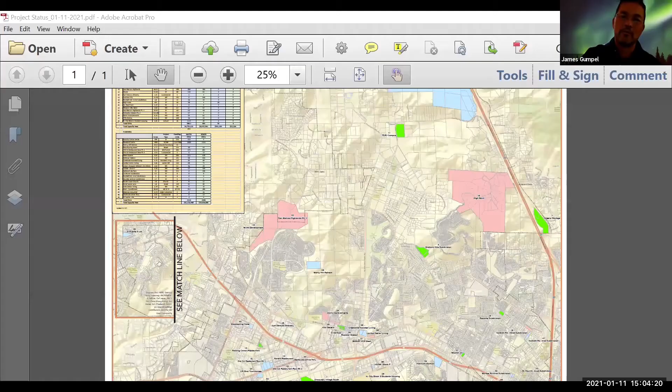Sure, okay, let me share my screen. So you guys may remember this map, and it's hard to translate on a Zoom meeting because it's a large map. So I'm not going to go into every project like Rob did—I'll stop and focus if any of the members have questions.

As far as coloration, if you see this green color, those are projects that are actively in construction. The pink or salmon color here, those are projects that are in plan check - little ones here, Richmar area off of Mission. And then the light blue color, these are new ones, planned projects that may or may not happen.

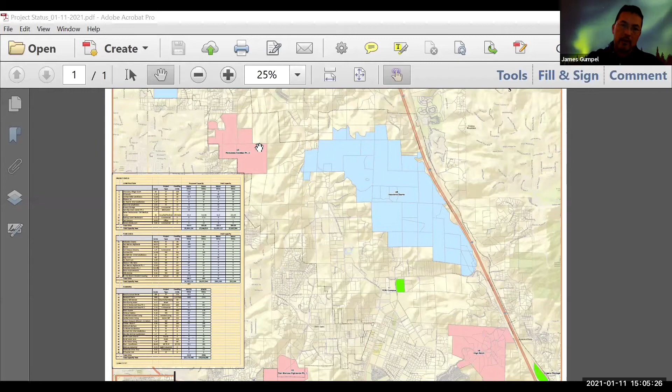As a reminder to the committee, projects that are in construction are certain - that means from a cap fee standpoint we've either collected or are going to collect it within the next year or two, three at most. The projects in planning aren't as certain, they're probably three to five years out before they're in construction, most likely. Some are less, and some, like this one here, may or may never happen. The project in planning is beyond five years out to may never happen. Newland here is a good example - they're more than five years out before they could do anything.

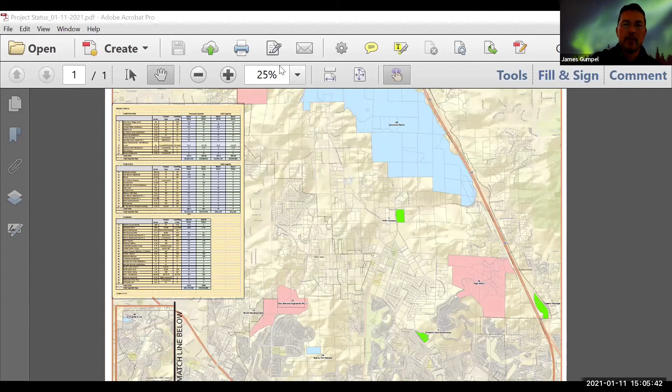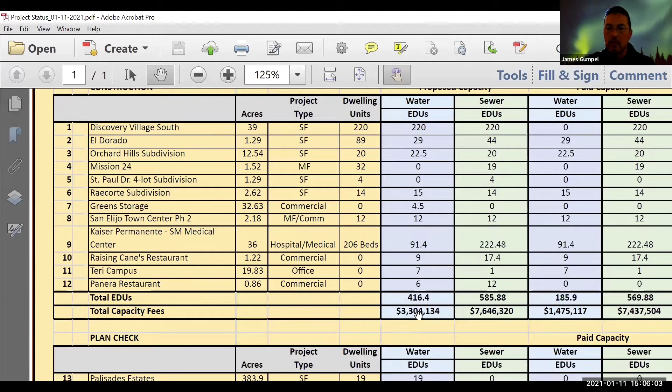So let me zoom up on the table and go over a couple projects. Here is the first project, the construction. The way this table is organized is we have the listing of projects in construction for our development services group, and the proposed capacity fees. You can see we're proposing here a little bit over 3.3 million in water and 7.6 million in sewer.

This next section is what has already been paid. In water, we still have almost $2 million to collect in capacity fees, but in sewer we've collected the majority of them. That's because of this project right here, number 9, Kaiser. Kaiser had 222 sewer EDUs, and they came in a few months ago and paid for everything - all their water and all their sewer.

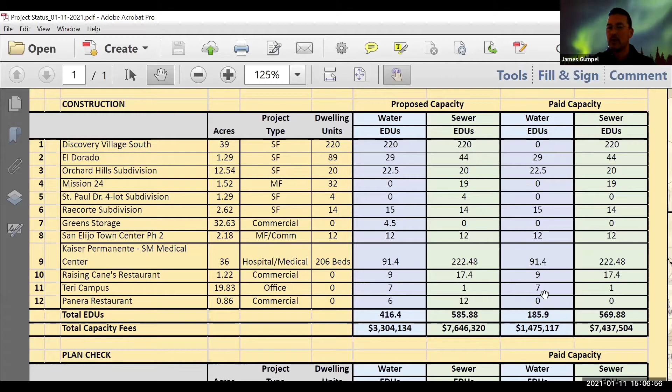So you can see across the board that they zeroed out, and they made the lion's share of the sewer capacity fee. Some of these other groups have paid capacity, like Discovery Village - they paid sewer capacity before we updated the cap fees ahead of time, and they knew the water wasn't changing much, so that's why they didn't pay water. That's why you see some of these numbers fluctuate. But we've done a pretty good year - this isn't an annual number, we're basically collecting sewer capacities, and we still have more water capacity fees coming in the next couple of years.

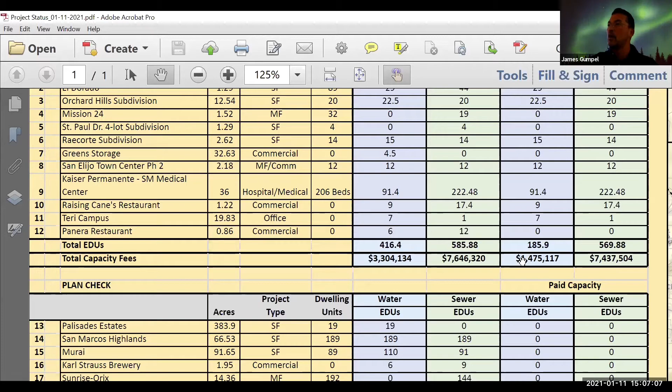On the planning side, these are projects actively in plan check. We have more than this in plan check, but these are the active developments - a lot of the other ones are smaller services or smaller projects. You can see here we have about $4.7 million proposed in water and about $9 million in proposed sewer.

Not much has been paid, and the main reason is the only one that's really been paid is this High Point project. The board may remember High Point development, the backside of Palace Vista or Emerald Heights, that went bankrupt in the recession. They had all their sewer capacity and water capacity fees paid. You can see everybody else is taking advantage of - it's not time for them to pay yet.

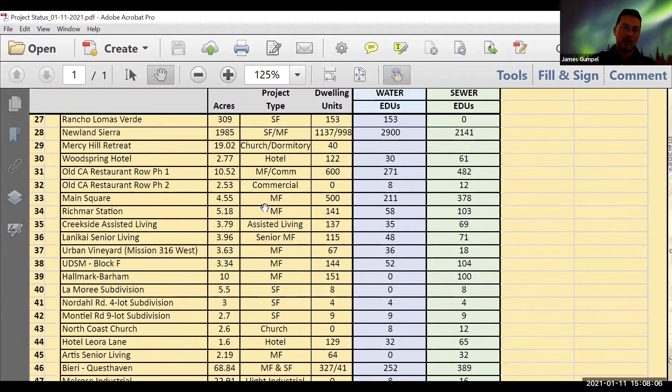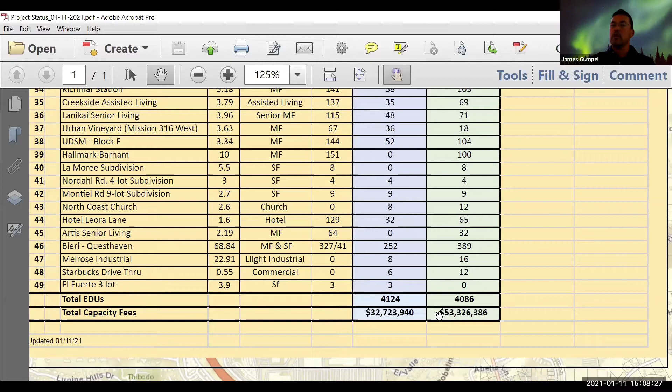And then the big pie in the sky numbers, all these planning projects - they have water sewer studies, other activities that the engineering staff has worked on, but they have not entered into plan check. These are big numbers, 32 million and 53 million. But some of those will never happen, some will get bigger, some will get smaller throughout the planning stage. So those aren't certain, and what we do is just shift the projects up from planning to plan check, from plan check to construction.

With that, unless there is a specific development that the members have any questions on, I'm happy to take any questions.

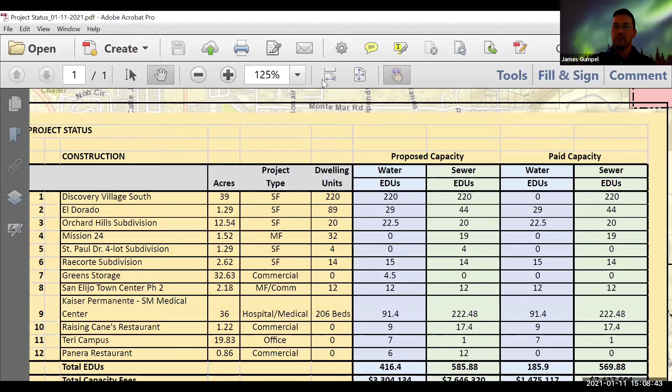Okay, any questions from Director Hernandez? No, I don't see.

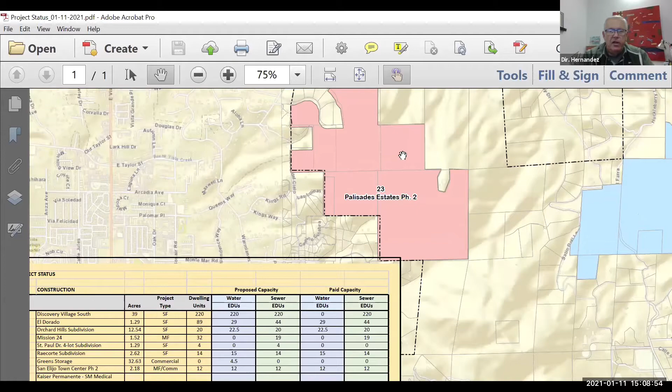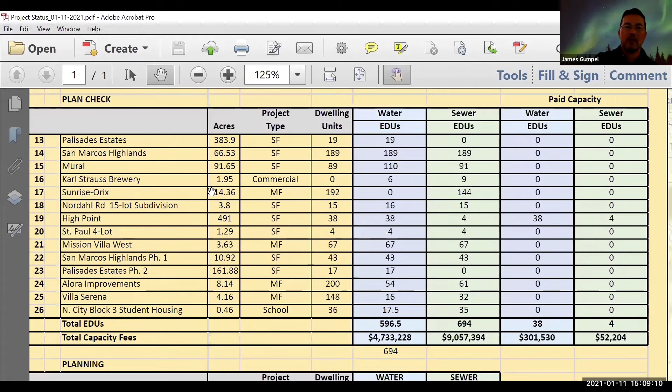What were they calling that - Main Street Plaza? I think that was a plan, but they never came forward to us. They've been working with the city, but they've never actually come into us for plan check. So we had them on - probably if you look at a report from a year or two ago, they were on the planning side. They've never actually come in, so I don't know if the city has it or not.

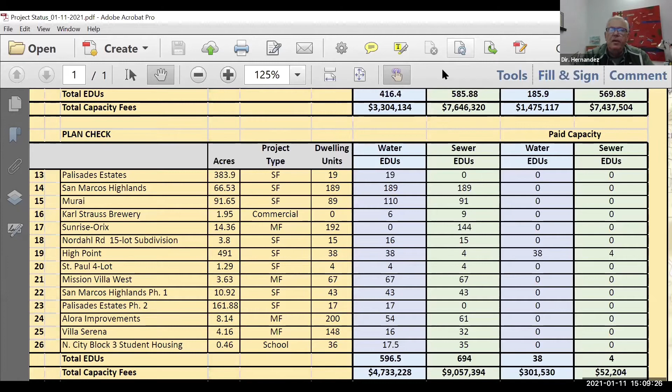Okay. Yep, that's all questions I had.

Before we move to the next item, an update on the Newland Sierra project. We received a letter from Rita Brandon at Newland Sierra confirming we've stopped all processing of their project. As you know, there was a voter referendum and the project lost, so they're not allowed to move forward. I don't know why Rita sent the letter, maybe to avoid incurring additional costs, or there's some land development reason requiring notice to all agencies with approval authority. I just wanted the board to know we received that letter. I confirmed with James, and I'll reach out to Rita to let her know we are not actively processing, nor will we unless they reinitiate with a new submittal.

I do have another question. Did we hear anything at all from Karl Strauss? Yes, unfortunately Karl Strauss has stopped their process at the city and is not moving forward at this time.

Do you know if that was COVID related, James, or something else? Maybe, I don't know. It happened earlier, I'd say middle to late spring of 2020, so COVID was here but the full impacts weren't known yet. I got the feeling they downsized it from a full beer garden restaurant to a brewing hub with outdoor seating, where mobile food units could permanently park or rotate, since they weren't going to serve food themselves. They'd already downsized quite a bit, and then they just stopped the process.

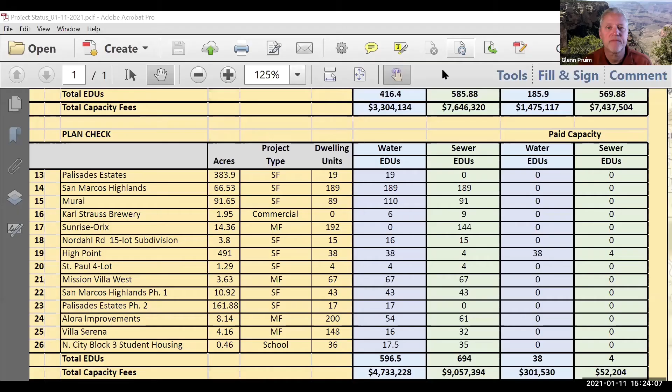As the committee may recall, we went forward with the septic hauling study, and in that study we basically showed it probably wouldn't pencil out with what the septic haulers are willing to pay. I think they're at 12 to 14 cents, and we were at 18 plus cents to do it for us. Then Sedron, a Pacific Northwest company, contacted us out of the blue, and we started going down that path.

They could basically provide a septic hauling facility, and they produce high quality water out of it. It's not potable water, but maybe could be used as recycled water. So with that, we thought maybe to co-locate it at our Mahr site.

This is a picture of the Mahr site. Can everybody see, it's just a Google image? Yeah, okay, yep.

Because it's kind of an industrial looking pump house, it basically looks like a treatment plant for septage. There'd have to be improvements on site, but we put it down here close to the bottom of the dam where we can. There'd be some earthwork necessary, but it would keep the line of sight from these houses.

You have Rancho Santa Fe Road here, and granted some of these houses across, and this new fire station, would be able to see it, but it's still sunken down below the road.

That being said, we've been actively meeting and discussing with the regional board. You may recall the last committee meeting, Rob Scholl presented this. They said the company Sedron was very optimistic, and we would just get a portion. So it'd be zero cost to Vallecitos, and we get a portion to basically allow them the property and the facilities to do this. None of it would go to Encina.

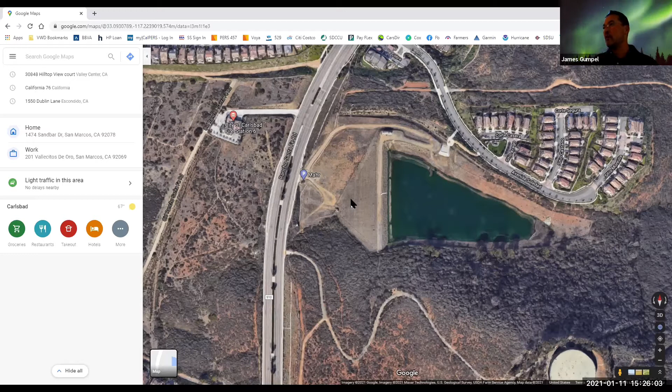They're harvesting the solid material and reusing it for other means, whether it's fertilizer or other means. And then there's a little presentation of their technology. I didn't copy that presentation because I don't want to get into that portion of it.

The update is, and we suspected this, is they've never done anything in California. So we said, you need to get to the regional board. They went to the regional board, and the regional board says you have to go through a bunch of hoops. They said, can we just do those hoops? And they said, absolutely not. So that's where we are today.

We've had 2 conference calls in the last 3 to 4 months with Sedron Technologies and the regional board. They're quickly learning they have to go through all the testing here in California, go through the regional board process. The regional board may kill it completely, to be honest, because even though we told them this would be a process that has to go through this type of vetting here in California, I don't think they really believed us, because they were able to do it up in Washington State without such oversight.

So I have a conference call coming up, hopefully sometime at the end of this month or early February. At that point there'll be a more in-depth discussion with their company to see if this is something they're going to move forward with, because they're just starting to get an understanding of what it's going to cost. They got some consulting pricing to help them out with the regional board process, and it's supposed to be done towards the end of the year, but they said it's going to be done in January. So based on that, I'll probably have another update at our next meeting, or maybe the March meeting, depending on the timing, and hopefully more substantial information on it.

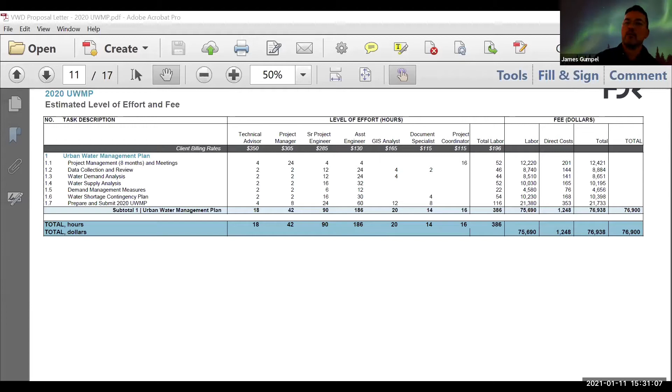Rob Scholl did our urban water management plan in-house in basically 2015. And in 2010, we also did that in-house. But each time we use a consultant to double check our work, just so we had that extra set of eyes that wasn't directly working for the district, in case there were questions.

And we used the same staff. Basically, we went out for proposals, used the same staff. But in this case, when Rob announced that he was leaving, I knew that we wouldn't have the ability to do the work in-house. So we went to HDR.

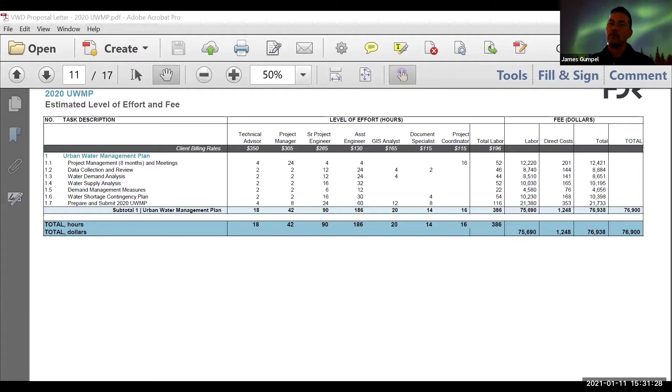And the reason we went to HDR is because the team at HDR reviewed our 2015 urban water management plan for compliance and completeness. And the staff worked on our 2010 plan, working for other companies.

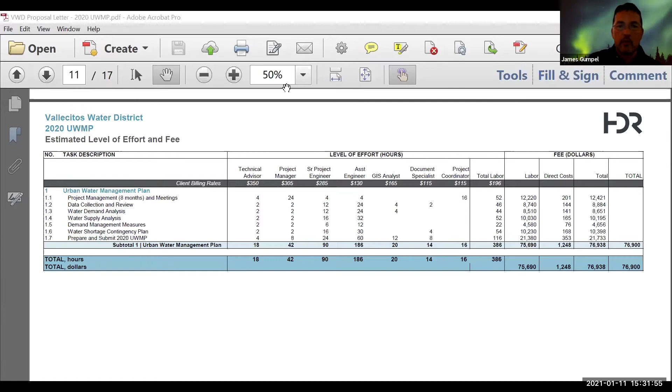So what I'm sharing here is really their scope, kind of going through it. I'm sorry, I'm going to zoom up a little bit because I'm looking on a laptop screen. Basically, it's the primary goal.

You've got your regular project management, your data collection review. Obviously, you have the water demand and the water supply. And then you have basically the other statutes of the water management plan.

The committee may recall the way it works for us, or really all member agencies, is our plan dovetails off of the county water authority's plan. So the county water authority's plan is actually due on June 30th, 2021 also, but they strive to get it done earlier, which gives us the ability to plug in numbers.

So what we do is we prep all of our plans, but we don't have the water supply numbers until the county water authority gives them to us. So we basically have everything done, and then we have to fill in the tables and make some modifications as soon as we get those.

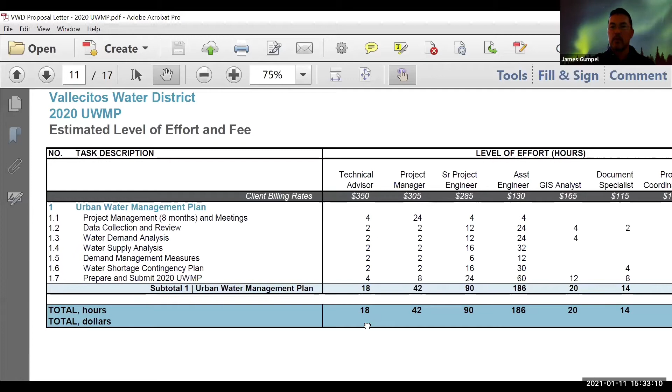Right now there's a committee set up through the San Diego County Water Authority, and I've been part of that. Rob Scholl is our main member, and now I've taken over. So we are getting number information that we're feeding to, or can feed to, our consultant. I knew we needed to get a consultant on board to finish this project up, and I'll be on board, hopefully, with committee support.

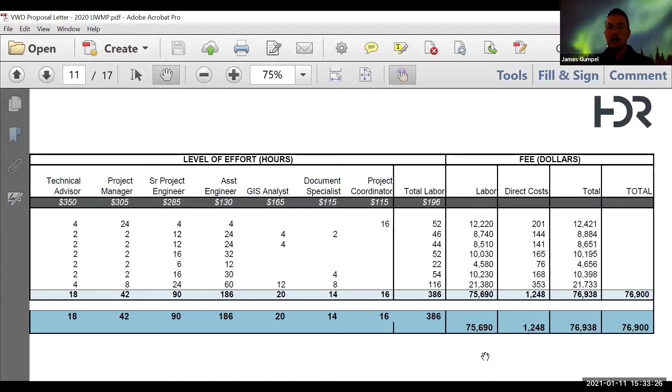Basically, to award HDR to perform the whole urban water management plan for $76,900. We went around and did a little bit of shopping around, and about $75,000 was everybody's ballpark number. I called several consultants and asked them what they're paying, and also I checked with Otay Water Authority, and they're paying about $70,000.

I didn't have a good feeling for where this would come in since we've been doing it in-house since 2010. So that's why I made a few calls to a couple of agencies to see what they're paying, and this is about the ballpark of what they're paying. So with that, I'd be happy to answer any questions.

Okay, any questions?

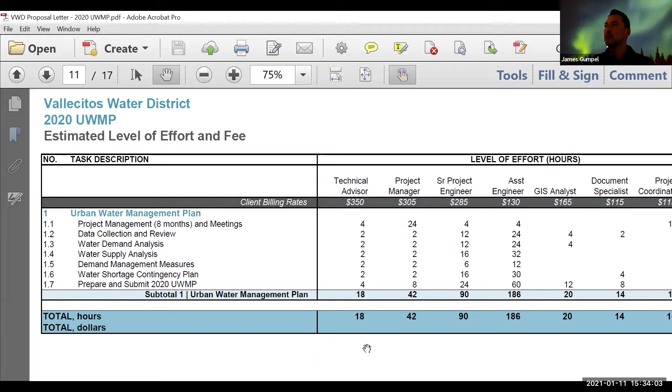If I may add real quickly, the committee members and the board may start to hear that there's some controversy surrounding the water authority's numbers. James mentioned that the water authority produces their document and passes along some information to us. A lot of the controversy surrounds this regional conveyance system project. You remember how controversial that was.

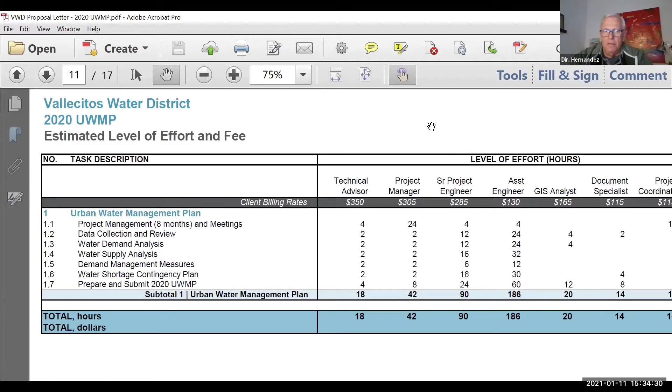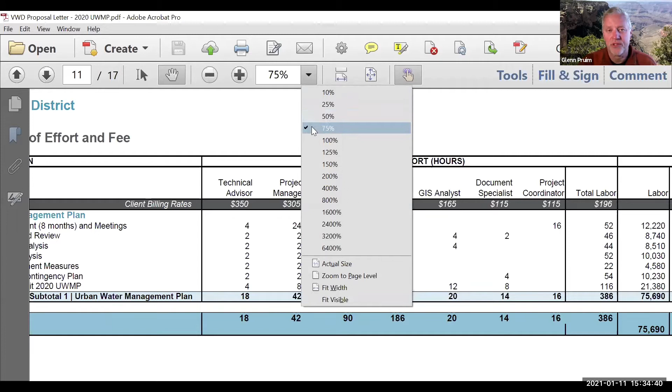There's a sense among some of the general managers that the water authority may be inflating the demands to justify the regional conveyance system project. So there's some pushback in the urban water management plan, more than you would normally see, because it's associated with that regional conveyance system project.

From what I've had conversations with both James and Rob, it seems like the numbers that the water authority is putting together for Vallecitos are pretty close in alignment. But the agencies that are really contesting it tend to be the ag agencies, which are also the ones that were heavily contesting the regional conveyance system project.

They don't like the water authority's methodology. They don't agree with their projections. They think they're way too high, kind of self-serving on the water authority's perspective just to justify the regional conveyance. It would be nice to separate those two, the regional conveyance system and the urban water management plan, but I think they're going to continue to be linked for a variety of reasons. We'll try to vet through that as we go through the effort with HDR.

Just want to give you a heads up in case you see some letters, particularly you, Director Elitharp, in your role down at the Water Authority. Okay, yeah, thanks for the heads up.

Speaking of controversy, with our current urban water management plan, we had some controversy with how we represented things, specifically with the Newland Sierra project. How are we going to, I guess the way we showed water supply availability before and after conservation was kind of the controversy. Are we going to consider showing that a little bit differently or more consistently with other agencies? So we're certainly aware of that controversy.

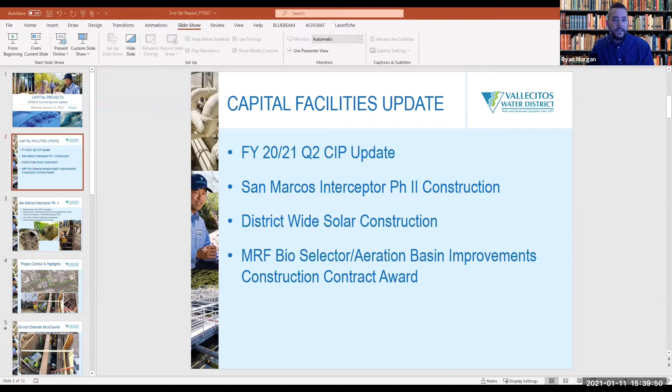To begin, I wanted to share my screen for a moment. We've talked about providing updates to the quarterly reports available online to the public. If you navigate to the Vallecitos webpage and get to the engineering department, you'll see Capital Facilities, where you can click on active capital improvement projects.

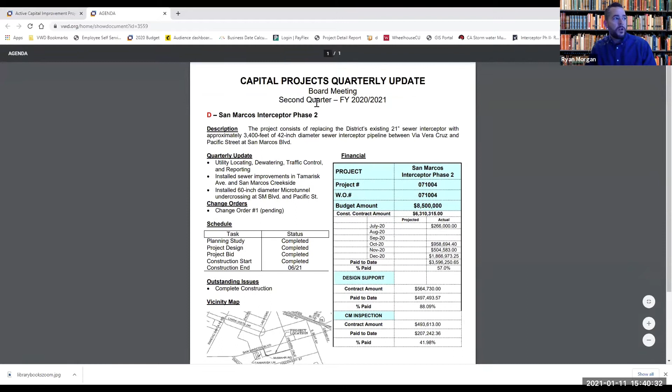That'll take you to an interactive map with thumbnails at our different project locations that are ongoing. If you click on San Marcos Interceptor Phase 2, it gives a brief description and a link to a quarterly update page, updated every quarter. This being one of the larger CIP projects ongoing right now, it provides a description, a quarterly update, change order update, and where we are in schedule, including anticipated construction completion dates. It also breaks down project billing between contractor and any professional services agreements we have ongoing.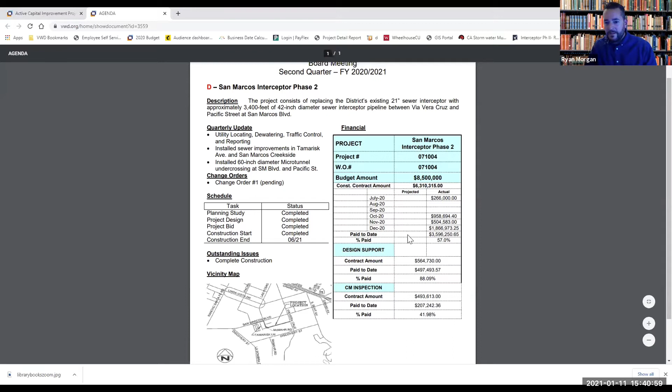This is available to the public at the Vallecitos website, and I just wanted to draw your attention to that. That item concludes item 6 on the agenda. Unless there are any questions, I'm going to get into the interceptor update.

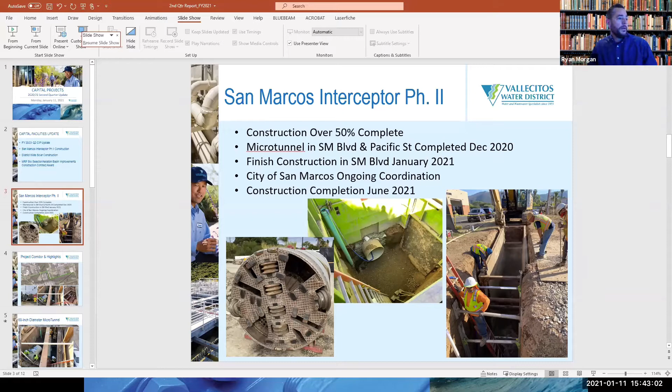Just to provide a quick highlight of the corridor, it runs from Via Vera Cruz on the creek down to Tamarisk Lane, where it turns northbound up to San Marcos Boulevard, and then heads westbound just past Pacific Street to our tie-in at lift station number 1.

More photos here of some of the access pit locations. The middle picture is the receiving pit for the tunnel. The picture on the right is the launch pit of the microtunnel. And on the left, one of the 60-inch diameter steel casings being flown into the trench.

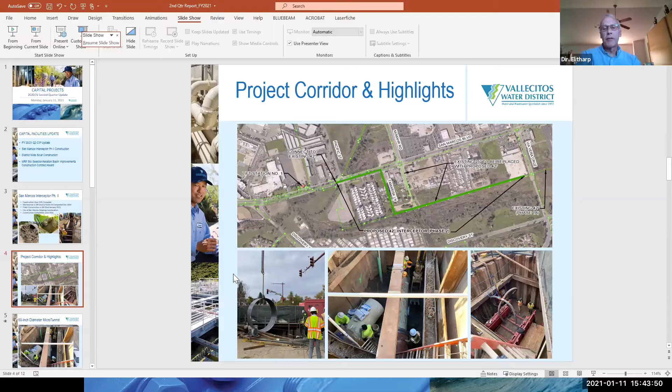So, Ryan, the line itself is inserted into the casing, is that correct? Correct, it's a 42-inch diameter carrier inside of a 60-inch diameter casing. And then is it the annular space that's grouted or something? It is grouted, yeah.

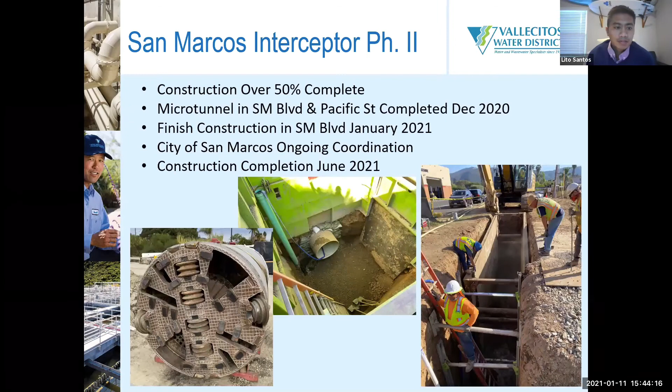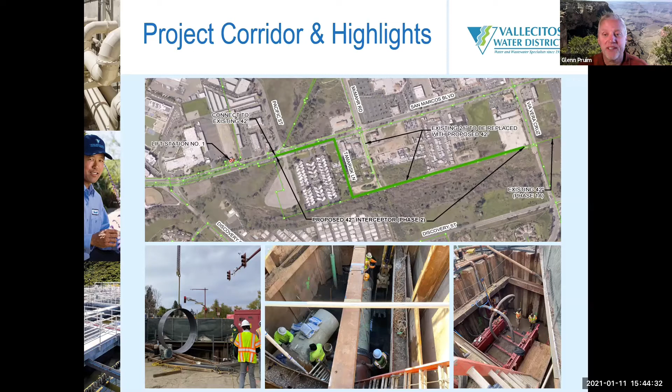I should have clarified at the beginning of the meeting, everybody's working from home now. Our COVID numbers were ticking up at work, so we closed down the office for a couple of weeks and sent everybody home. This is the second week of the closure, so people are scrambling. It's a little more difficult working from home since we don't have dual monitors and all the niceties we have at work. So bear with us.

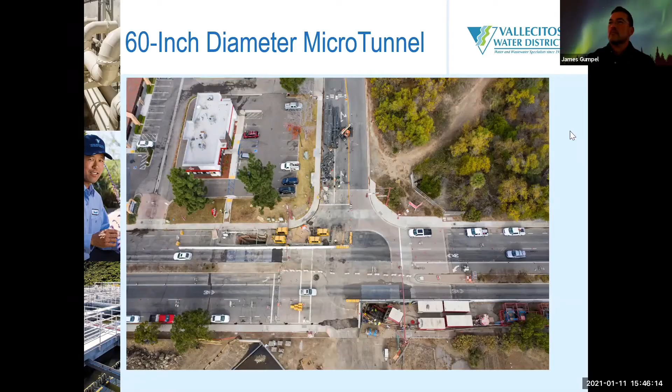That's a great picture. I apologize, my PowerPoint seems to be lagging. These are big image files. Okay, I jumped ahead four of them. Sorry, just bear with me one moment.

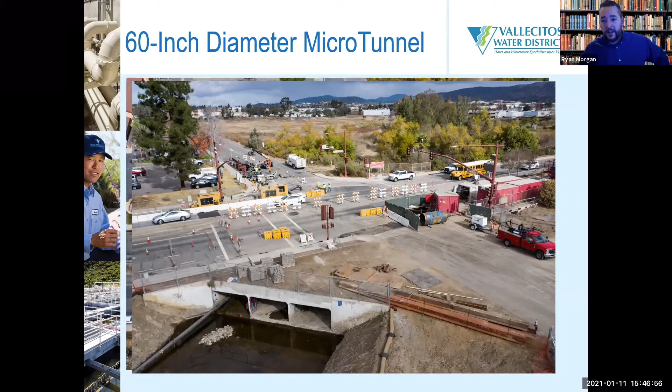You can see the 60-inch diameter casing on the right there, about to be inserted into the launch pit. This is just a capture of the launch pit and the crew working on the microtunnel operation.

The alignment had to change in construction because it looked easy and wide open, but we actually encountered a lot of unforeseen utilities, as you might expect, in San Marcos Boulevard. So we had to modify the alignment a little bit on the fly to suit our needs and what we were looking at out there.

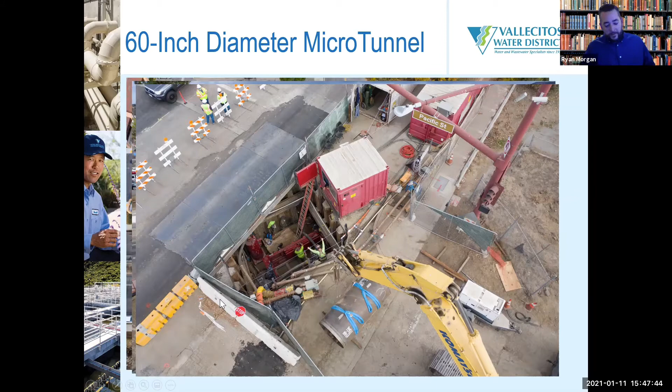If you look closely, the shoring actually had to be redesigned to support traffic loading. This is a through lane of traffic on San Marcos Boulevard, so the shoring is actually supporting the roadway here, which is pretty interesting. You can imagine how noisy that got down there for the workers. This is just another vantage point of that, also showing how the excavation undercuts the roadway there.

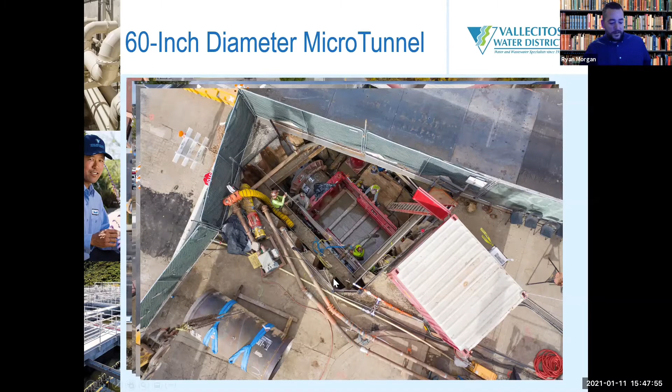We have this drone footage available, and we are going to work with our public relations department to put together a video of this, and I'm sure they're going to do a great job. These are just some of the stills that we captured out of that.

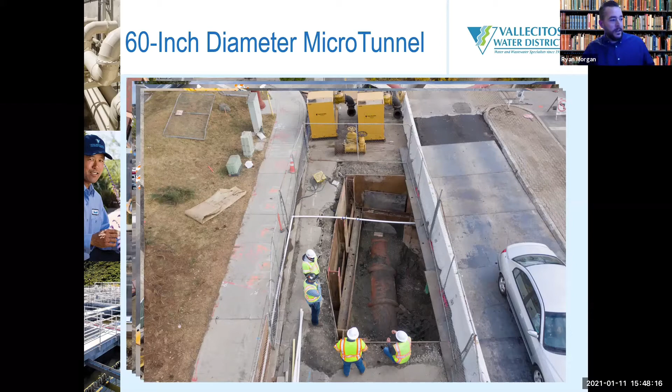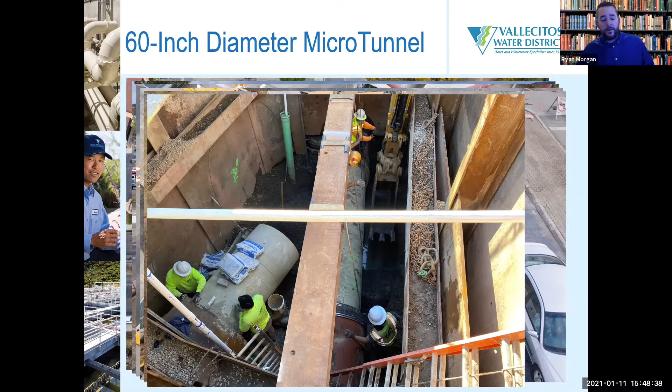This is the manhole number 1 tie-in location, our furthest downstream tie-in location, just west of Pacific Street. That's the existing clay pipe, the existing interceptor sewer. This is the same location shown cleaned out with the piping removed. You can see our tunnel on the left coming through. That's the tie-in, which will be a 10-foot diameter manhole base, a good size manhole. So that's just providing some visual illustration of the job.

It's been interesting. Just a quick update on schedule: we expect San Marcos Boulevard construction completion in February of 2021. All of this is this year. We will be complete with construction in the creek between McMar and Via Vera Cruz around May, and then construction complete in June. The board can expect to receive project acceptance in July.

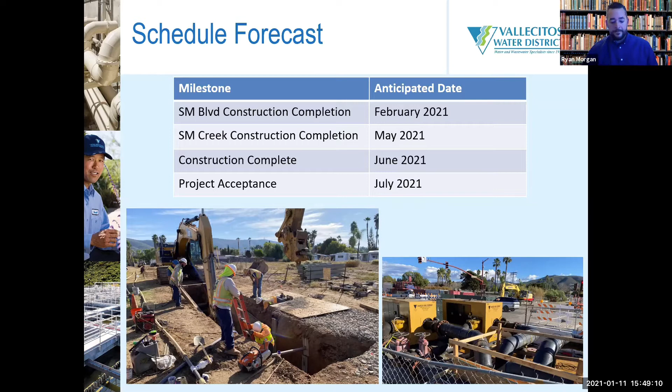Budget is tracking well. We have an $8.5 million project budget in total. Contract value was just over $6.3 million. Our change orders to date are just over $266,000, the majority of which have included the design and construction rework of the San Marcos Boulevard undercrossing, the tunnel that had to be realigned. We had additional groundwater issues and dewatering to deal with, and also all the unforeseen utilities and additional potholing and other things as well.

Our 5% contingency on the project is just over $315,000, so we're working with about a $50,000 buffer right now before we have to come to the board for additional money. Our CMA inspection is just under $500,000 for that professional services. We did request more labor out of them than was originally scoped due to working day and night shifts for a period of time to benefit the project overall and schedule, so we're expecting an amendment there which will be forthcoming. In total right now, with everything we know, we're just over $7.3 million on the job, so we do expect this number to grow, but it should not exceed the overall project budget.

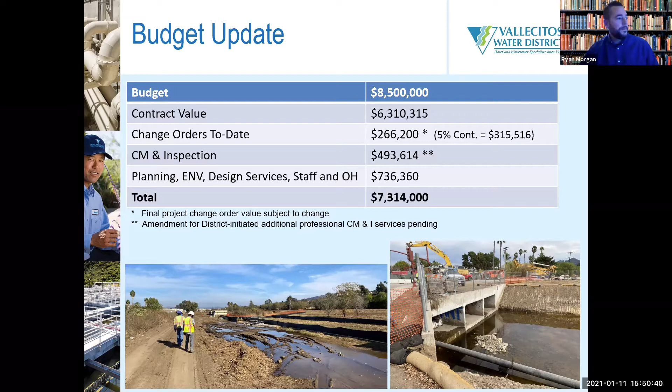Switching gears now, that completes the interceptor update. If there are any questions, I can field them now, or feel free to stop me as I go. Just to clarify, we're moving into item 8 now on the agenda.

Correct. Any questions from Director Hernandez? Nope, I've been out there a couple of times, seen the progress. Great. For district-wide solar, the project is moving forward.

We issued them a notice to proceed on December 2nd to begin work at Lift Station 1. They mobilized immediately, and crews have been out there installing the solar racking, the ballast, and the arrays, as you see in these pictures in the backyard of LS1. Construction is anticipated to continue through January and finish in February at Lift Station 1.

There is amendment number 2 forthcoming from the solar provider, which will extend the commercial operation deadline to a date in March. With that, it's actually not Lift Station 1 which is the critical path on this project.

It is the utility service upgrade at the Twin Oaks reservoirs, essentially waiting on SDG&E to complete their design and coordinate with their contractor on that utility service upgrade, at which time we will de-energize the switchgear at the reservoirs for a week, perform the tie-over, and then re-energize. We're coordinating with water ops on all of that, but that is turning out to be the critical path item for this project.

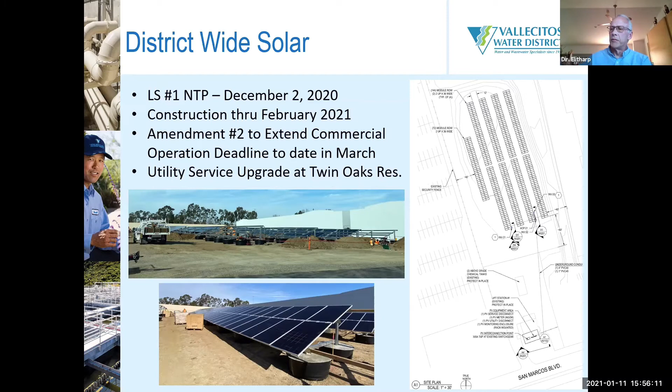Okay, thank you. And with that, I'm going to turn it over to Capital Facilities Engineer Lito Santos, who's going to provide the biological selector project update at Meadowlark.

Thank you, Ryan. As Ryan mentioned, our next project going into construction is at our treatment plant at the aeration basin, which is highlighted in that yellow box on the aerial there. The aeration basin basically diffuses air prior to secondary clarifiers, which is just on the right of that yellow box.

Currently, the existing aeration basin panels are no longer manufactured. They're failing to a point that we can't repair them. We have two very inefficient basins, one that's moderately operating. Most of our operators are skeptical of whether we can continue operating this way going into the summer months, where our wastewater treatment demand is higher than usual. So this is one of our critical projects.

The aeration panels are obviously at the end of their life cycle. Back in 2018, we began to study two alternatives. One was just to replace the aeration panels in the aeration basins with three aerobic zones. The second alternative, shown in the picture on the lower left, adds an anaerobic zone, which is a gas mixing zone, plus two aerobic zones.

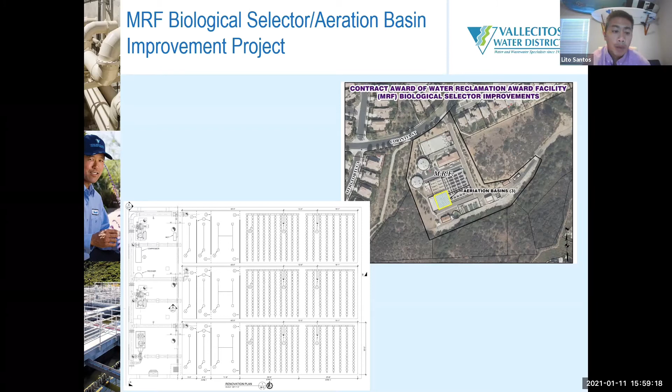As a result of the competitive bids, the attractive pricing of the bioselector, as well as having a reduction in treatment costs in the future, was very attractive to our customers and to us. So the bioselector will be going forward as a recommendation to the board.

We plan to bring this to board award next week, on Wednesday, January 20th. Notice to proceed hopefully in March, going into construction probably April or May after we get the parts, and then hopefully with project acceptance in October, finishing construction probably September.

Sure, thanks, Lito. So the aeration portion of the project is for us — we need that to treat our sewage, whether or not we're making recycled water. It's part of our secondary process. But the biological selector process that Lito alluded to is specifically for recycled water. That makes the quality of the recycled water better. We do not need that to create secondary effluent that's legally allowed to go to the ocean outfall.

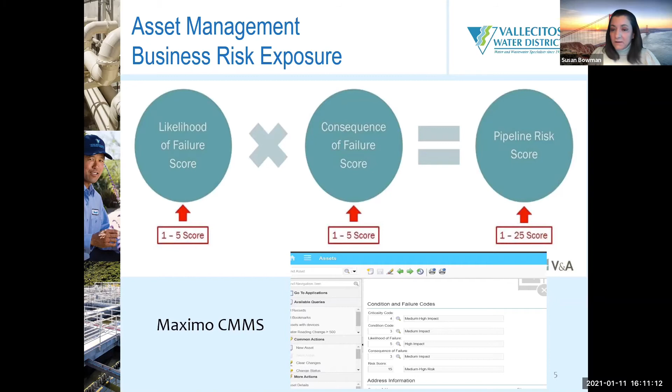The way we're implementing this and incorporating it into our maintenance system is that on every one of our assets, we will have fields recording the criticality of the asset, its condition, and the likelihood, consequence, and ultimately a risk score. This will be applied at the asset level - an asset can be a stick of pipe, a pump, whatever piece of equipment it may be. We'll have a standardized scale to understand where our high risk assets are, and they can be prioritized for renewal and replacement.

Over the last year we've been working with V&A as a consultant on our asset management plan. In cooperation with the district, we have determined risk factors for pipelines - likelihood of failure. As you see here, install age, PSI, break history, and other factors are incorporated and weighted into getting the likelihood of failure.

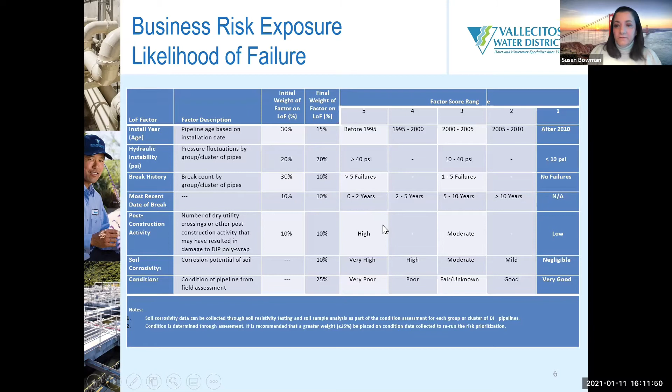Similarly, for the consequence of failure, factors include whether a failure would affect traffic, or the cost to repair, replace, etc. So this is what we're applying to the pipelines right now, and this is something that will be incorporated into the larger asset management plan.

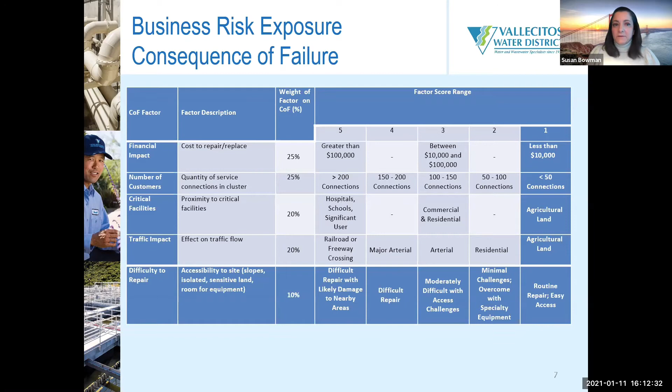But it's important that as we move forward, we're going to work with the board of directors to come up with workshops to really help refine this - what our factors should be, et cetera - diving deeper into the asset management business processes.

So with those two risk factors, the likelihood and consequence of failure, we've actually, with V&A, come up with the risk level of the current ductile iron pipes. A lot of it is based on break history, age, etc., as we showed in the previous slide. You see down here, this San Elijo Hills area, which we know is a problematic area, comes up as medium-high, areas that are likely to break and have failures.

I just want to emphasize Susan's point. As we go through our asset management plan and start developing it, we'll need to get a consultant on board to help finalize it. But before we really finalize it, we're going to have some workshops - workshops with operations to really nail down our maintenance practices, our critical facilities, and our procedures.

And then there'll be management workshops to figure out the appetite for how aggressive we want to move forward with some of these, whether condition assessment, pipeline, or full asset management. And then at the end, we're going to have workshops with the board to bring back cost benefits and decision-making processes on what the board's appetite is to move forward, whether it's condition assessment and asset management. Are those pretty much the workshops we talked about, or is there any that I missed?

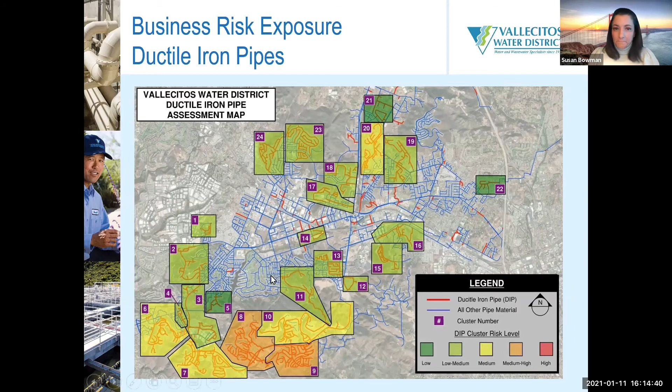Yeah, right. We're going to work with you, with the board and management, to really zero in on what type of condition assessments we need to be doing going forward, where to put our dollars on that, and understand whether we're going ahead with replacements, et cetera. So yeah, absolutely.

Okay, if you'll recall, this is our roadmap from last year. These percentages haven't been updated - this is where we looked at the beginning of 20. It's been an interesting year, but we've made progress. Again, I haven't updated these percentages, but as you can see, we've worked with V&A to get some of our condition assessments started, looking at remaining useful life, et cetera.

So as James mentioned, going forward we really want to get input from the board on, among all of these items, where we want to focus our efforts, what's critical path, what we should really be focusing on. We'll be getting those on the schedule here going forward soon. This is one of the slides and items we may be bringing back more regularly to the committee, to both get a feel and track of how we're doing, and also get a temperature of the committee on where we should push or hold back and what should go to the full board.

Okay, great. Questions on our asset management progression right now?

And I would add to that, Susan, that the board, not just the committee, is going to hear a lot about this as we go into the budgetary process. As I mentioned before, you're going to see a lot of specific projects identified out of asset management, but you're going to hear more about just the topic of asset management. I always liken asset management to having a car with a lot of miles on it - you want that car to keep running, you're not ready to get rid of it.

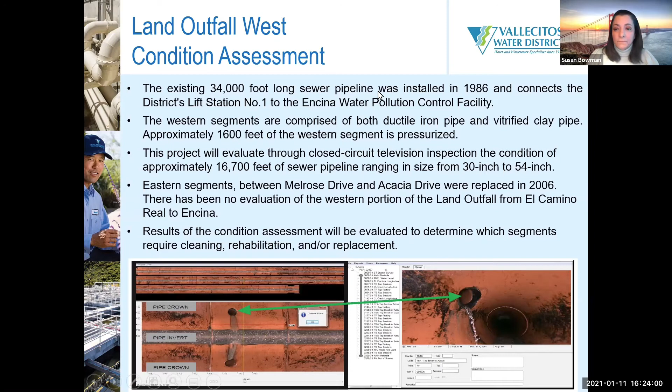Just to emphasize, the majority of this pipe we haven't looked at since 1986 when it was first installed. The portion mentioned from 2006 was the crossing underneath I-5 and several hundred feet east of I-5 that was videoed when we slip-lined I-5. So of 34,000 feet, 11,000 feet is the siphon we're not doing, leaving roughly 23,000 feet, and maybe we looked at 1,000 feet of it. So that's about 22,000 feet that I'm very anxious, and almost afraid, to see.

Yes, you have so little faith. Yep. So yeah, it'll be interesting.

So we have selected Hoch Consulting for this contract. They came in at 149,800, so we're pleased with that. They have shown a very good understanding, from their proposal, of the factors that need to be considered as we do this inspection. Again, being a large continuously used pipe through sensitive areas, high traffic areas, and feeding right into the treatment plant, there's quite a bit of coordination that'll need to occur.

So this, again, right now, what you're looking at is the area that we're going to be assessing. And I wanted to mention that the cost sharing is in place for this section of the pipe.

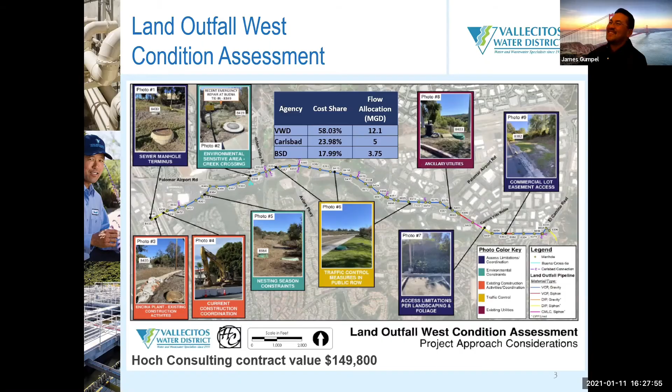Okay, great, so you're somewhat familiar then with this program, the California Public Utilities Commission Self-Generation Incentive Program. It started in the early 2000s as part of the energy crisis when they were doing all those brownouts and rolling blackouts, and it is an electric utility ratepayer funded program. So sometimes you'll see where it says ratepayer funded, just to be clear, this is from ratepayers for the electric utility who are funding this program. And it was initially conceived as reducing the peak load during that time.

Then in 2011, California changed the primary purpose to be focused on greenhouse gas emissions. Most recently, they have repurposed it to be used for providing resiliency to organizations such as ours during the public safety power shutoffs that have been introduced due to the wildfires, the recent events with the wildfires. So there was additional funding put in so that water, wastewater, and other critical facilities would have energy backup. So this is an energy backup program, and we are partnering with Tesla to put this in place at the district.

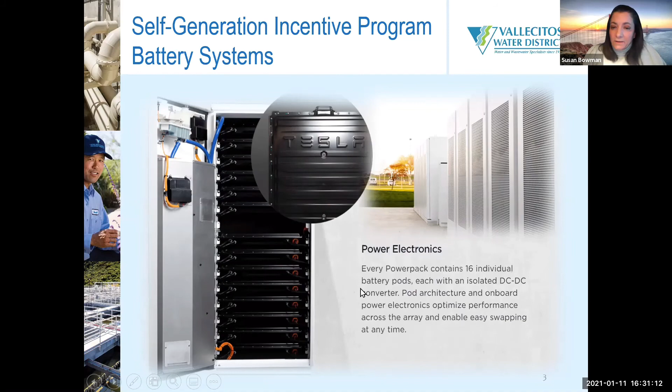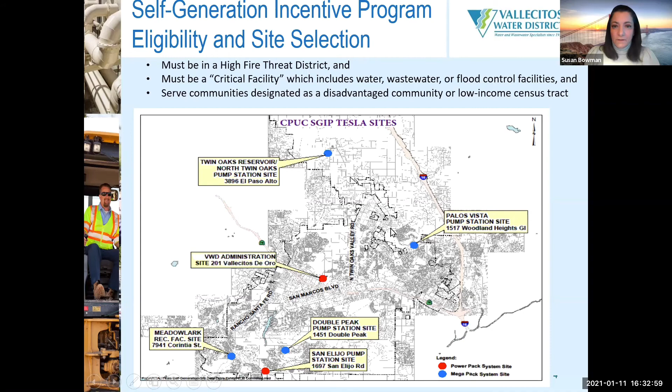So this program, as I said, it's the electrical ratepayers. We're getting a total value of batteries being donated to VWD through this program of over $6.7 million. So that's significant and gives us resiliency at all of those sites for many years into the future.

So again, all the engineering, design, installation, operation, and maintenance costs will be covered by this program for 10 years. It basically covers everything except for staff costs, which is pretty minimal on this. Tesla is going to perform the maintenance themselves during this 10 years.

And we anticipate, although it is primarily for resiliency, Tesla calculated that they anticipate a 10-year energy cost savings of over 1.6 million.

Just to clarify, that's on today's rate. They didn't escalate it, so if the rates go up, that number changes, but they just basically did a straight line. And with these batteries, if we need to do pumping during the day when the rates are higher, we can have battery storage and utilize the energy in the batteries.

And the batteries, although this is a 10-year program, the batteries themselves do have a useful life of 20 years. So we anticipate this being functional for 20 years. After the 10-year period, we have options for what we can do with those batteries.

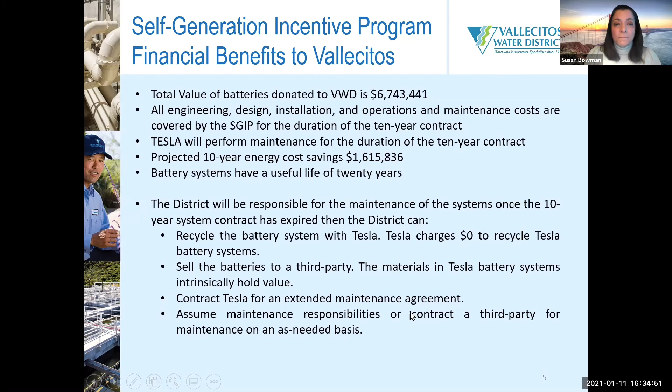And here are specs and the financials for this. Again, as I mentioned, battery value - and this is just the battery value. This is not all of those additional costs that are being incurred, which we're not paying. So 6.7 million of batteries.

So when the district had that outage about a month and a half ago, this again would have been something that we would have been able to rely upon for quite a few hours of backup time.

And keep in mind that our existing backup systems still work. So if and when the batteries were to be drained, then our normal on-site generator or roll-up generator system works. We don't give up any resiliency or backup system that we already have.

And again, some cost savings if we utilize the batteries for purposes of utilizing lower cost energy during nighttime, et cetera.